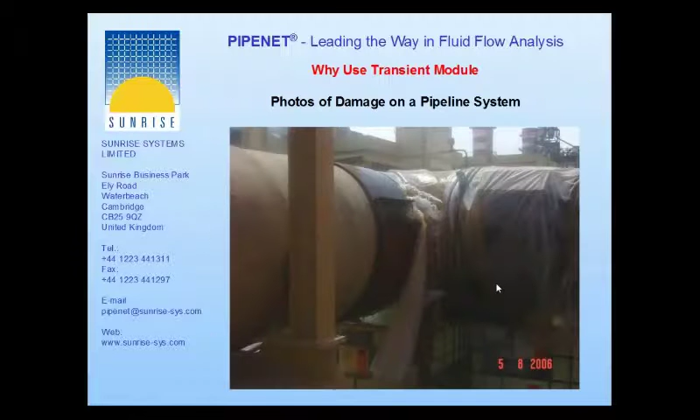I would like to show you the picture of damage on a pipeline system. That is due to pressure surge. It is cracked because of the force from the hydraulic transients.

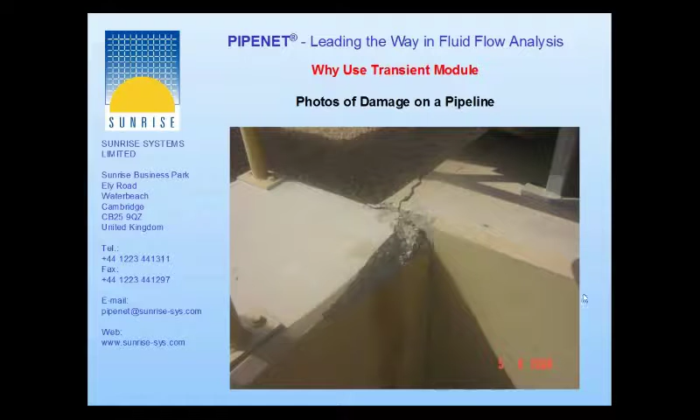PIPENET has 3 modules: standard, transient, and spray sprinkler module. The spray sprinkler module is for design of fire protection systems, and particularly it complies with NFPA rules and with some other rules as well, but the most important one is NFPA rules.

The transient module is used for dynamic analysis and it is for many kinds of applications. It is used, for example, for cooling water systems, loading and unloading systems, water injection systems, subsea and cross-country pipelines, steam hammer, and modeling control systems. All these applications are used for calculating the pressure surge. And as you know, for a pipe stress analysis, PIPENET needs to calculate the hydraulic transient forces. And programs like CAESAR II and ROHR2 can automatically read this kind of information from PIPENET. The other very important aspect of PIPENET is the ability to model the control system.

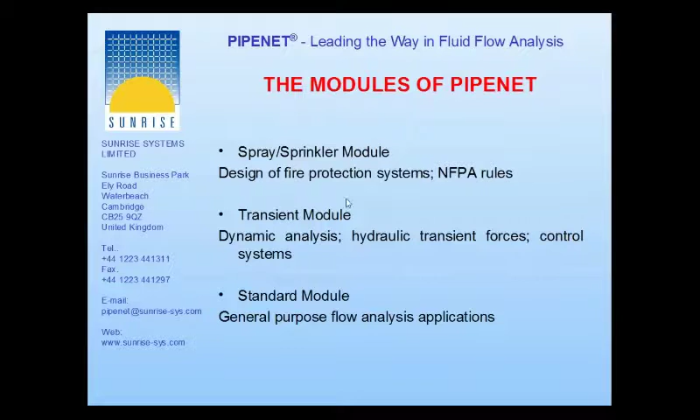The third module is called the standard module. It is for general purpose flow analysis applications. In the process industry, for example, it is used for modeling or designing cooling water systems, steam distribution systems, and HVAC systems and such applications. The standard module and spray sprinkler module are steady-state programs, while the transient module is a dynamic program.

I would like to show you now one system. It is a very complicated fire protection system. It is from the Middle East. You may know the oil company named Maersk. It is an oil company from Denmark, and this is their fire protection system in operation in the Middle East, in Qatar. You can see how complex that network is.

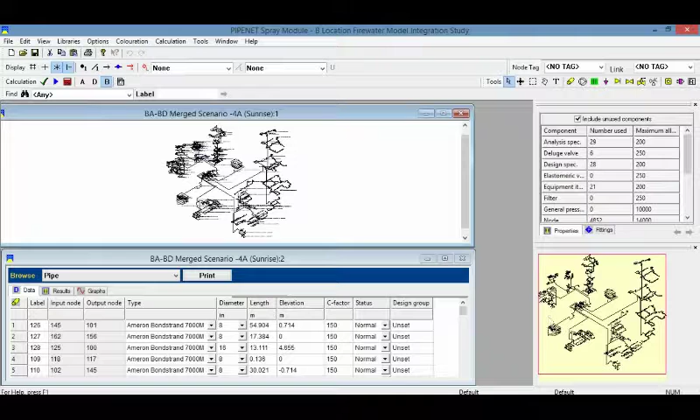So this area here in PIPENET is called the drawing area. And this is called the properties window. This is called the overview. And there is also the fourth window called the data window. And you can switch off any of the windows, or maximize or minimize, and so on.

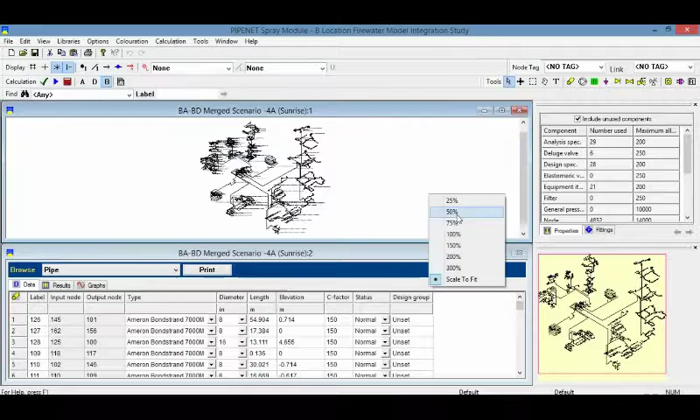And here on the overview window, you can see that there is a red box. And using this red box, you can move and navigate through the network. So what I am going to do now is to click in the drawing area. If I click in the drawing area, it shows the number of components which I use.

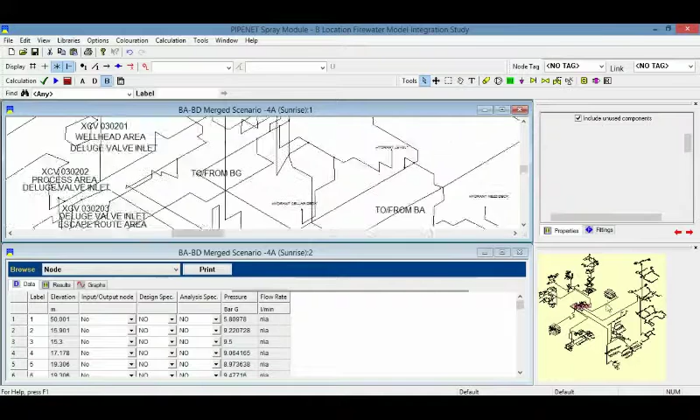So I can move, and if I click on any item, the item becomes red. And the attributes of these items are shown here. When I zoom in, you can see a little bit more. So we can do a calculation quickly for this. One click.

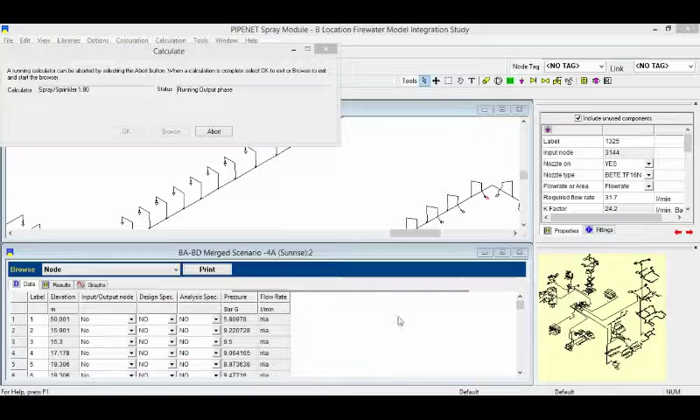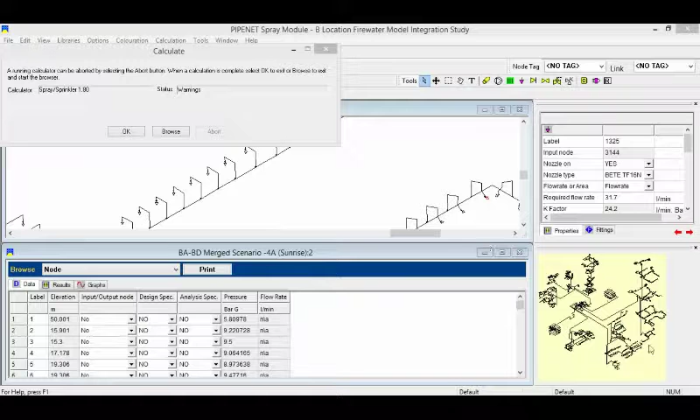As you can see, it is a very complex system of 5,000 nodes and more than 3,000 pipes, so the calculation can take a little bit of time. But you can see that even though it is such a big system, really big system, the calculation is done quickly.

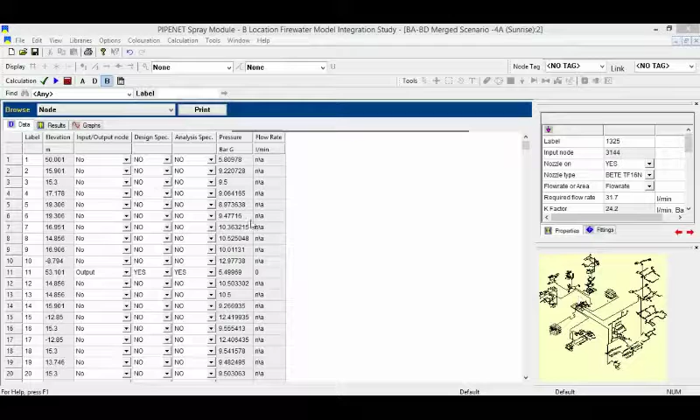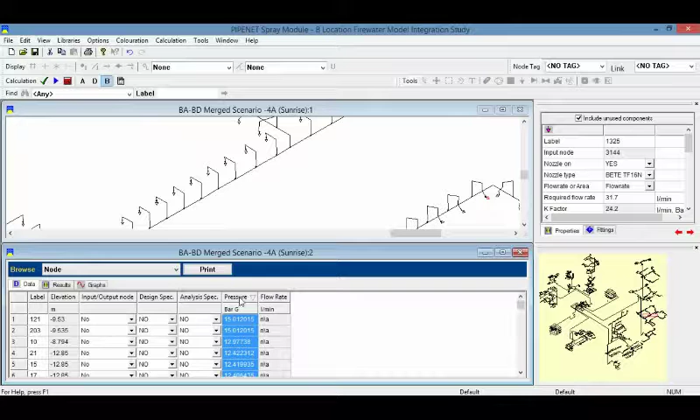So we can maximize this window, and you can see all the nodes and the pressure, and also the flow rates of the inputs and outputs in the system. So if I would like to find out where the maximum pressure is, click window, then horizontally, we have to click on this pressure, click again, and it will show the pressure in decreasing order. This pressure is the maximum pressure. It is about 15 bar maximum, and I would like to find out where this pipe is.

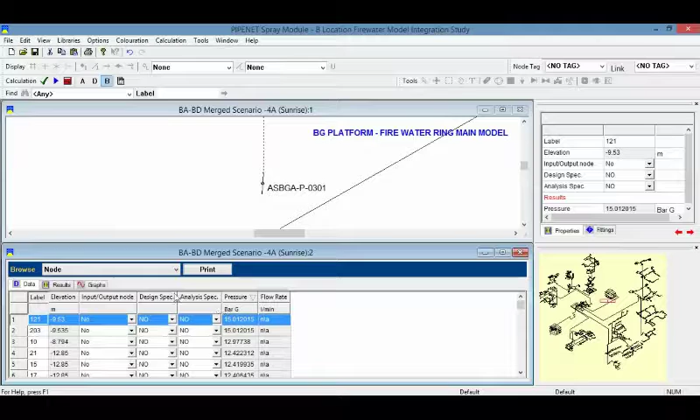So click here, and it will take me straight to that node. This will save a lot of time because you do not have to search through all the network.

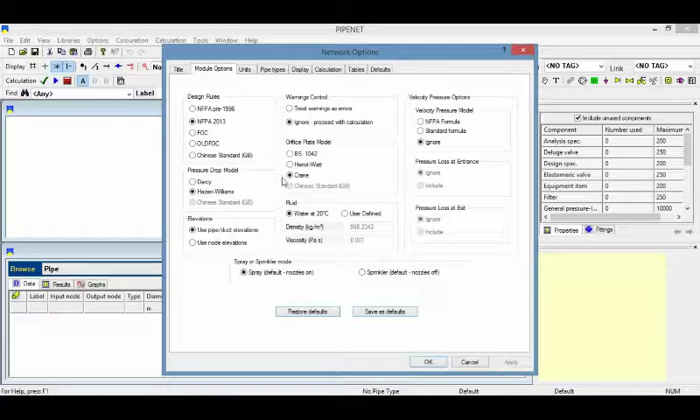So now we are going to see how we can input the network of the spray sprinkler module. I will click spray sprinkler. So I will create the user network of the spray sprinkler module. You can see the four windows, and everything is blank at the moment. I will go to options, then module options, and you can see that there are some combinations here.

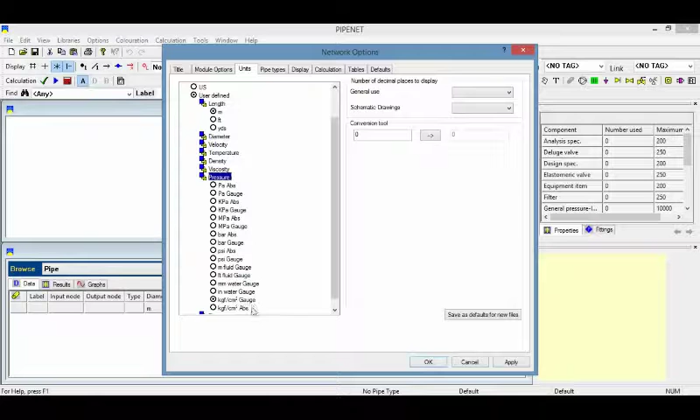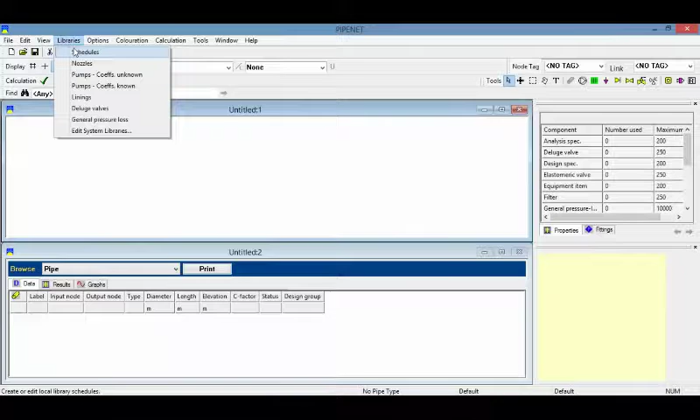I will go to the units, and you can see a range of units: length, meters, pressure, kilogram per centimeter square gauge. I will click OK. Now let's go to the options, then pipe types. But what we can do, we can go to the libraries and create a new schedule, we can create a pipe schedule.

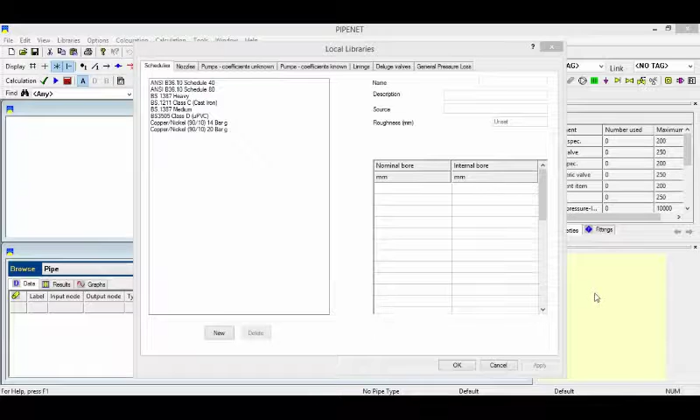I will click on new, and we can write the name, new, description, new schedule, and I can input the diameters. 34.56, 41.56, 75.58, 102.80, and you can see the nominal sizes. And this is the actual interior diameter of the pipe. Here is the roughness of the pipe, and we can give 0.0457. So apply. You can see here.

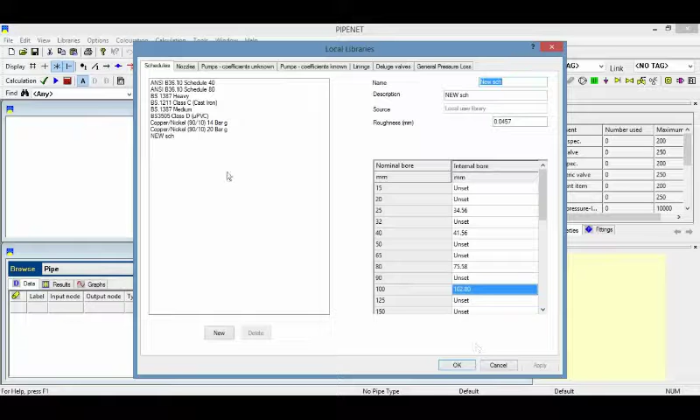So once we are here, we can input some nozzles. We will click on new. I just input the name of another nozzle. I will write HV45, and the description, High vel K45. Then K factor 45. Minimum 1. Maximum 10. So a high velocity nozzle with a K factor of 45 and minimum and maximum pressure of 1 and 10 kilogram per centimeter square. I will click on apply,

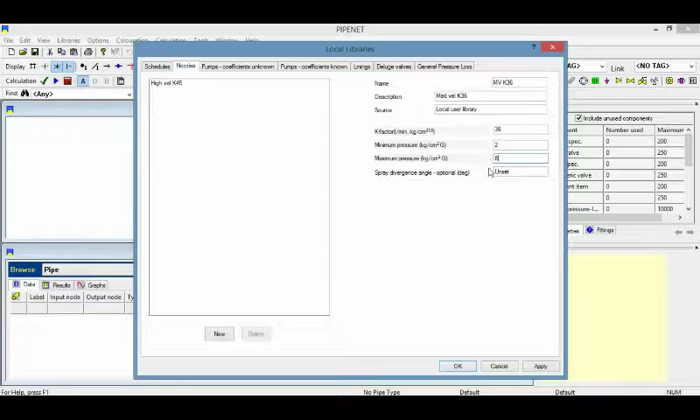and again new, because I wish to create another nozzle. So I will write MV36, description, medium, K36, factor 36, and the minimum 2 and maximum 8. So the minimum pressure is 2 bar and the maximum pressure 8 bar, or kilogram per centimeter square. It is almost the same as a bar, and the K factor is 36. So apply, OK. I will click on OK and finish. So now I'm going to save the file. Click Save.

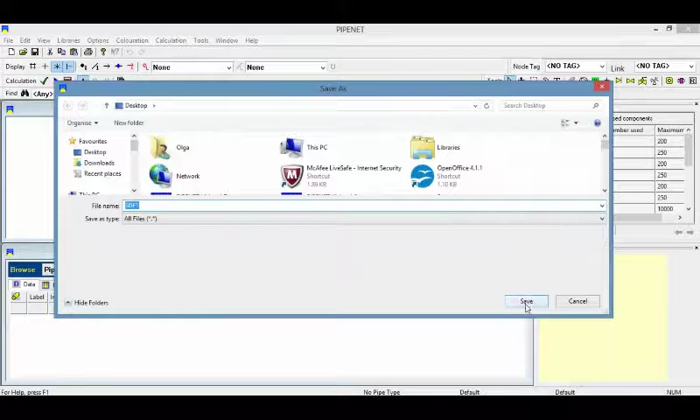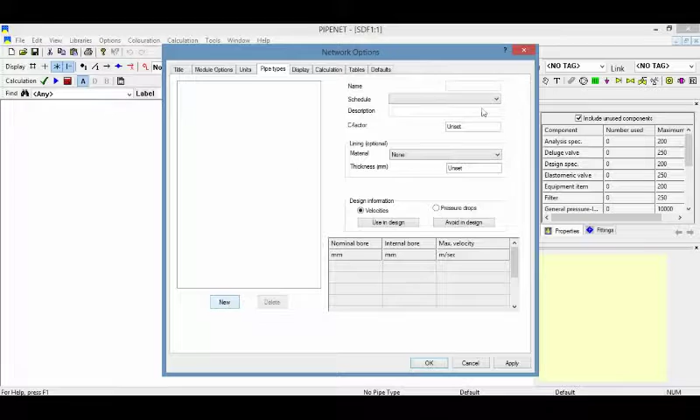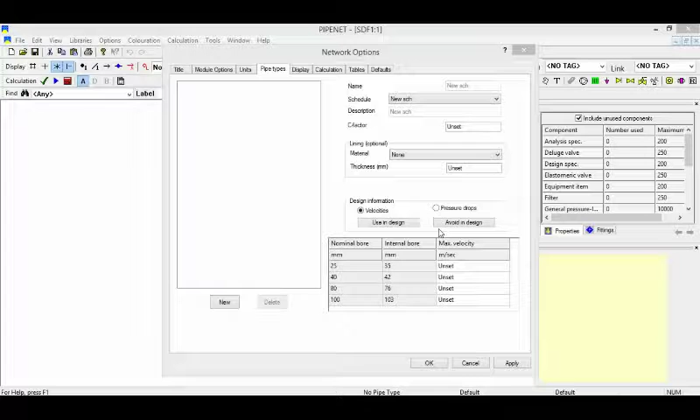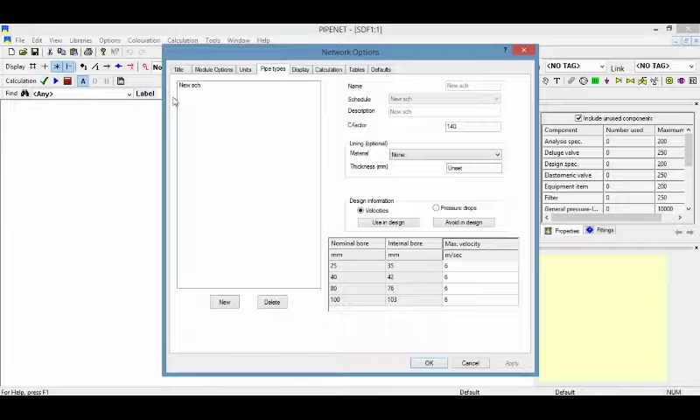And now we are going to maximize the window, the drawing area, and here we are going to click on options, pipe types, and I will click on new, and select the pipe schedule that I'm going to use in this network. Please remember that in the library there are many pipe schedules, and I wish to use the one that I created already. So, as fire protection systems must be according to NFPA rules, we must use the Hazen-Williams equation, and for that we have to give a C factor. I will give a C factor of 140, and the maximum velocity I will give 6. I will click on apply, and it goes to the pipe schedule. I will click on OK, and now I can start to input the network.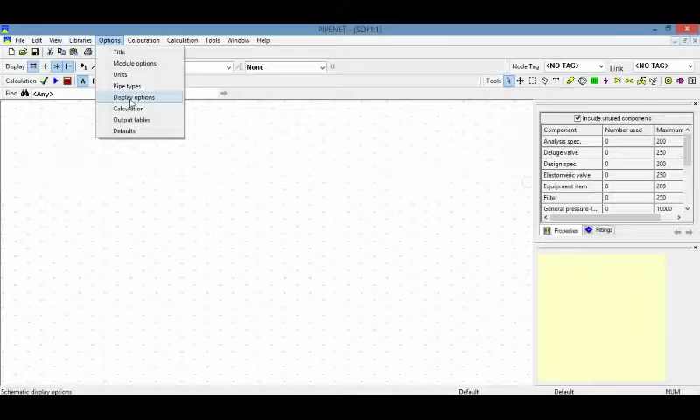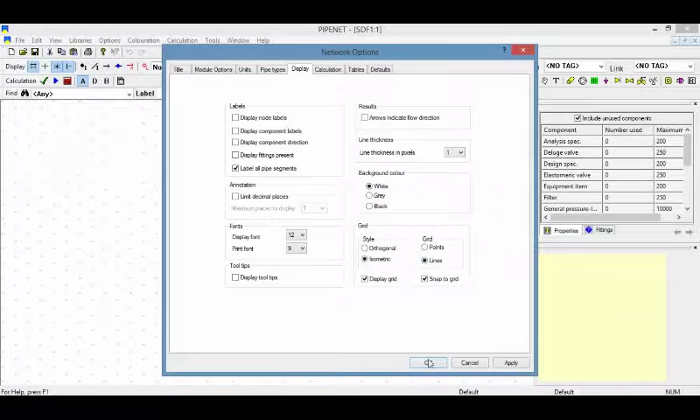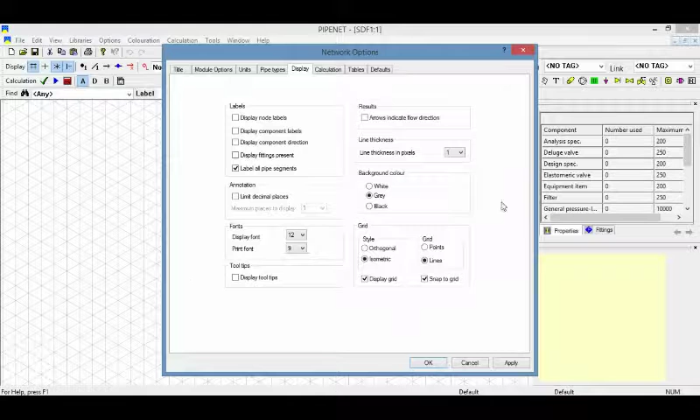For doing that, I will do the following. Click Options, Display option, Grid. The grid can be points or it could be lines, and you have to click on OK. So now you can have a different background. I will click again Options, Display option. It is personal preference. I will give gray. And you can also change the line thickness, and I will give number 2. I will click OK.

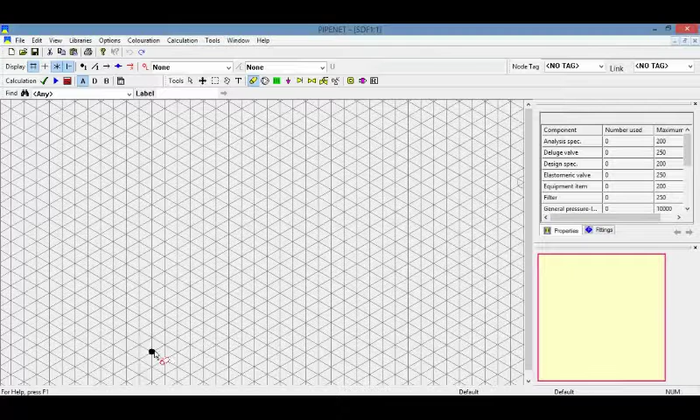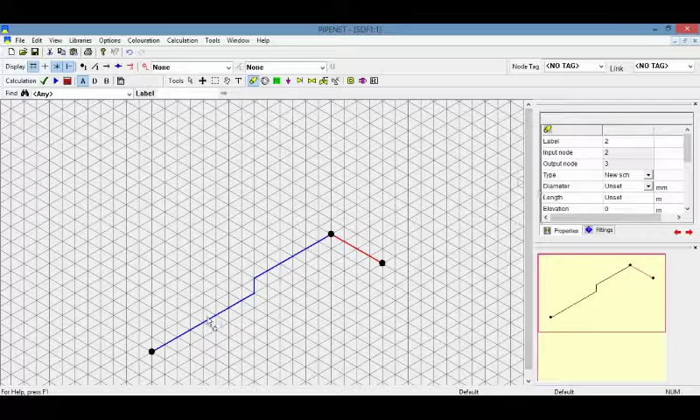So now I am ready to input the network. I can put this here. So now I will click and, like so. So click and click. So you can see that this line becomes blue and that line is red. Red means the property window is the window for that item, and blue means I have not input any attributes for that item.

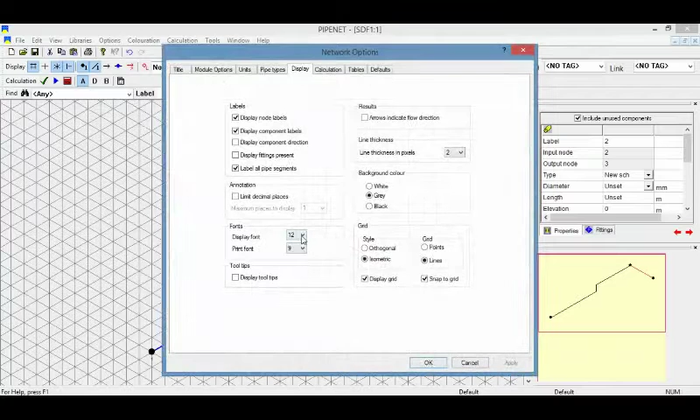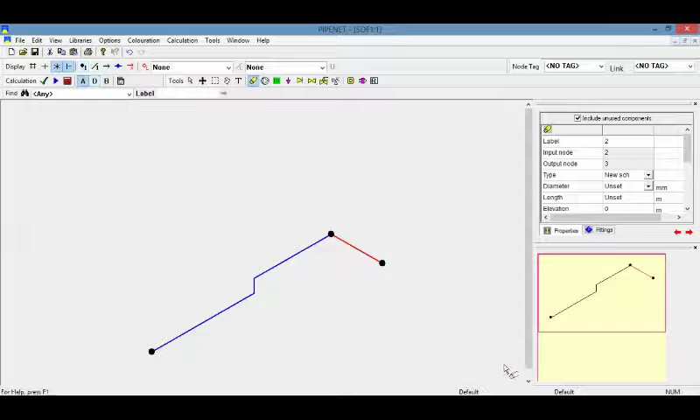And as well, at any time, you can also display the labels of the items. To change the font size, you can increase the font size. Click on Options, Display option, and you can give the font size, for example, 22. Okay. You can also switch off the grid so you can see the numbers more clearly. So we do not want to see labels now, and I will switch them off. And quickly I will draw the schematics. Click, click.

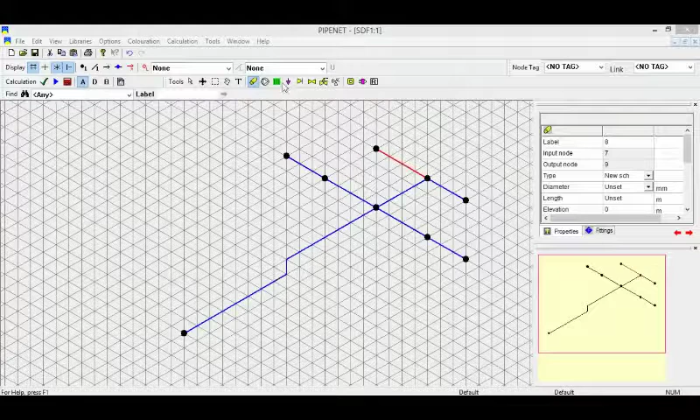I'm going to pick up the nozzles. Click. Click. As you can see, there is still blue and red color. The red means this property window is for that item, and blue means I have not input data, so I can select any item and it becomes red, and the others are blue.

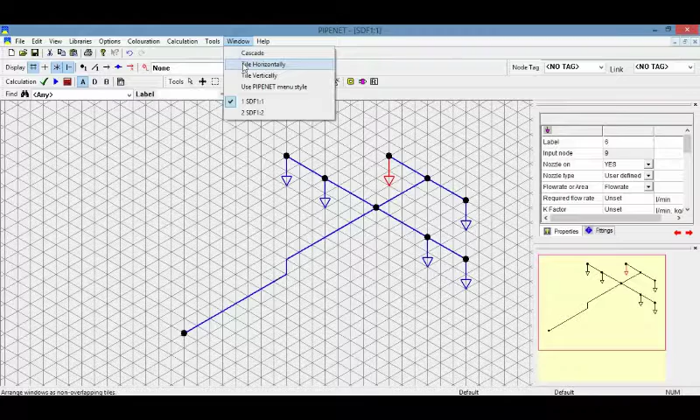I will click on the window. Now click on tile horizontally. Now scale to fit. And I will switch off the grid. And now if I click anywhere in the drawing, all items are blue because I did not input any data. I'm going to click on that.

Diameter. I'm going to give diameters of 25 to those pipes. And when I click on another cell, I click back. Paste in column. I'm going to have 25 in all cells.

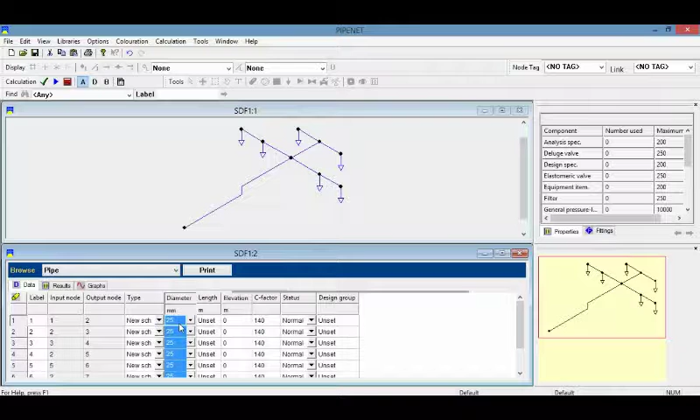I'm going into the length, and I will put 5. I will click on another cell. I will come back, click on the cell, right click, and paste in column, because usually all these pipes have the same length. You can see that these pipes have changed color to black. If the color is black, it means that all the attributes for that item have been input.

Of course, this pipe is different from the other pipes. I will click on the pipe, and I will make the length of the pipe 12 meters. And I will make an elevation of 2 meters. It means that node number 2 is 2 meters higher than node number 1. If node number 2 was below number 1, then it would be minus 2.

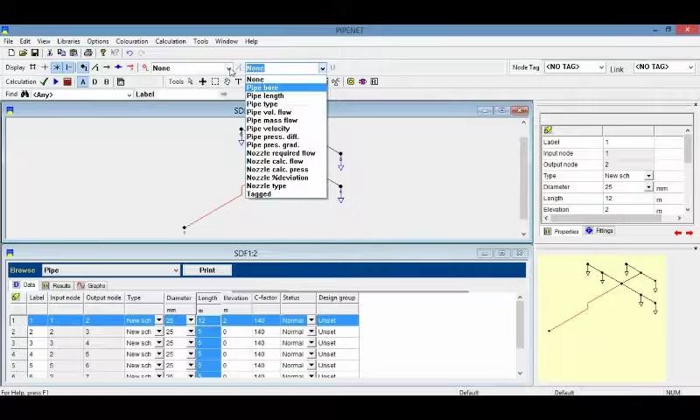I will come back. We also can show the elevation. Click. Elevation. And it shows the elevation of the nodes. This node is 0, and because of this change, all the nodes have an elevation of 2 meters now. Okay, I can put none again.

I wish to input data for the nozzle now. So I will click on the data window, the nozzle type. I will choose a nozzle which I already input into the library, HV45. Then click on the next column, click back, right click and paste in column.

Then we wish to give a required flow rate. So for required flow rate, we can give 65 liters per minute. I will click here, back and paste in column. So you can see that all nozzles now became black. I can save it.

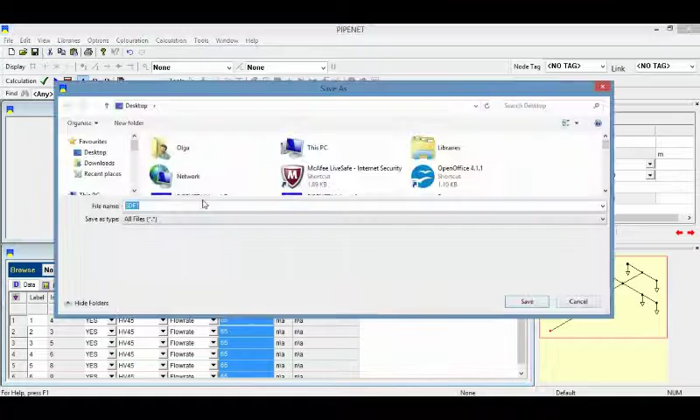I have to tell PipeNet that this is the input node, and this is all I am going to do now. I am not going to tell PipeNet anything else. I am just going to tell PipeNet that this is the input node. So this is an input node. I am going to save it.

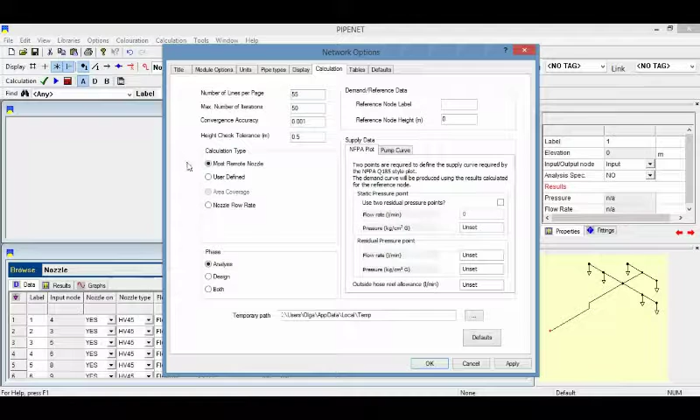And PipeNet can give you many different kinds of calculation. So I can go to the calculation, specs for calculation, and the most common is the calculation type most remote nozzle. This one. This means that the furthest nozzle in the system will have exactly the required flow rate. I will click OK and save it. Okay, and now I can do a calculation. Click on the calculation button.

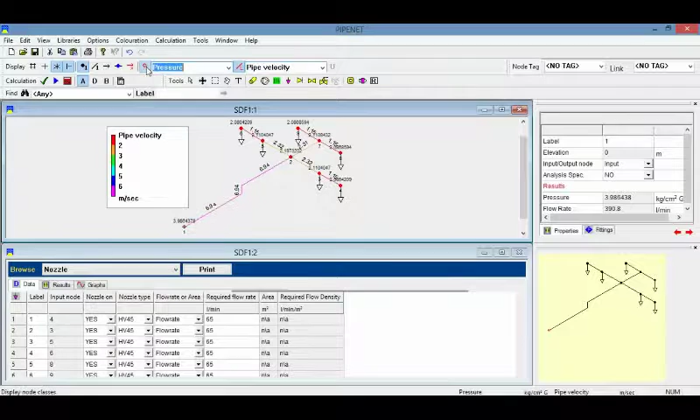I can show the velocity. When I click on this, it will show what the different colors mean. I can show you the pressure as well. I can maximize the main window. You can see more clearly. I can reduce the font size now.

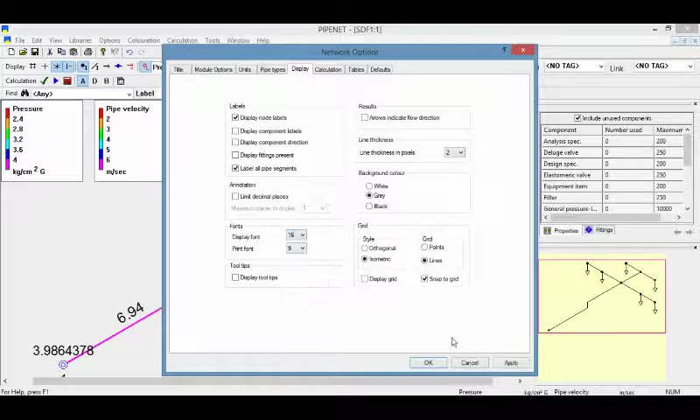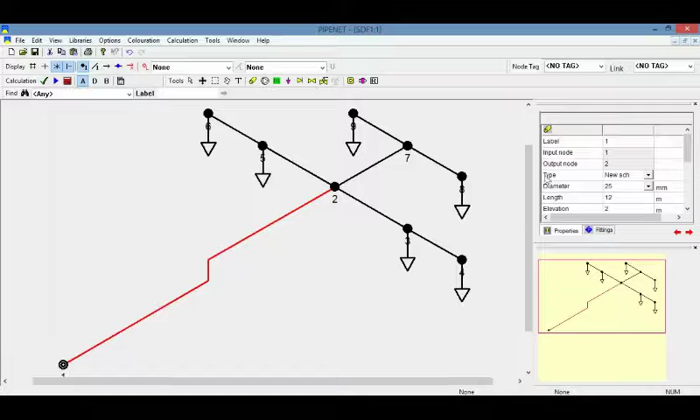I will click on options, display options, network options, and font size. Okay. So the drawing now is easier to read. I can switch off the coloration. So I will click on any item, and this property window will correspond with that item which is in red color.

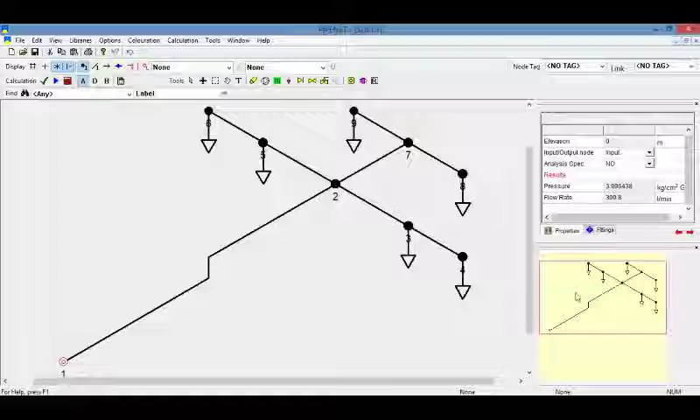If I click on the first node, the node becomes red, and this is an attribute of the node. So you can see the pressure. I will click on the window, tile horizontally, scale to fit. So this is a very quick demonstration of the ability which PIPENET has in the design of fire protection systems.